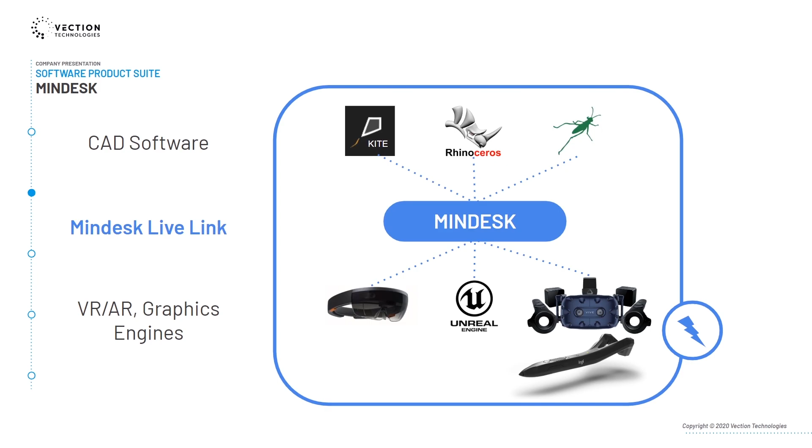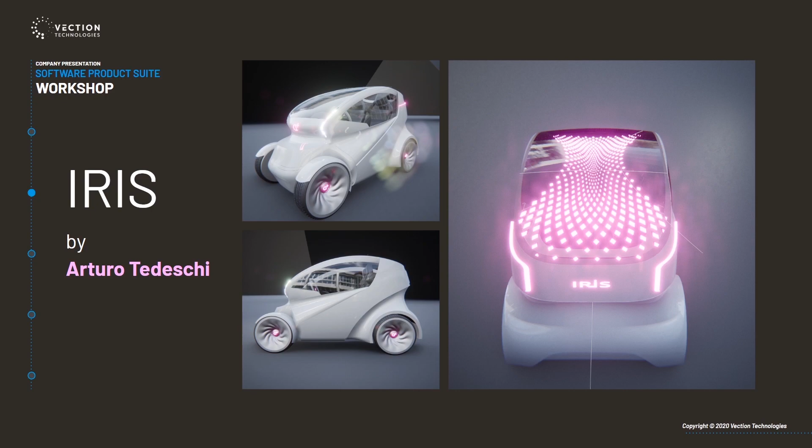So today we're going to show the process of creation of a 3D car using Rhino and Mindesk technologies. As I mentioned earlier, Mindesk is a real-time platform that connects CAD software like Rhinoceros, but also Grasshopper and Kite, to new technologies like AR, virtual reality, and graphic engines like Unreal Engine. Without further ado, I will leave the word to Arturo Tedeschi, who will present an original electric car concept called Iris.

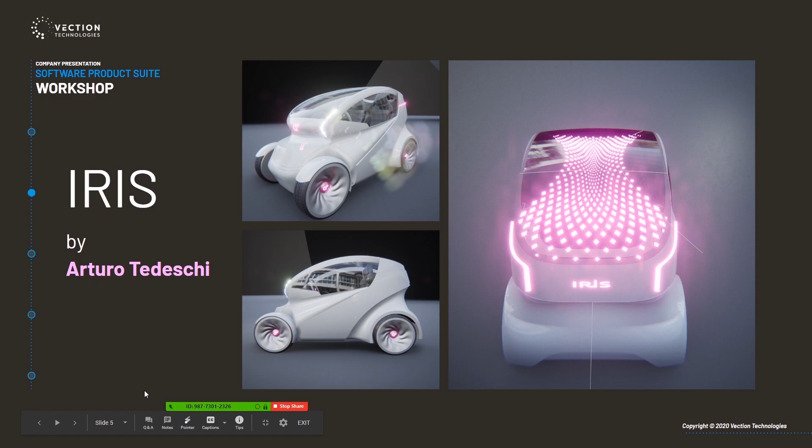My name is Arturo Tedeschi, as Gabriele mentioned before. I'm a computational design expert, and I'm the founder of AT, an office which works for all industries facing challenges connected to geometric complexity. Actually, we are not strictly car designers, and we are also involved in tool development.

So for us, with this concept, we explored the idea of a design journey - from a first sketch done by hand, through virtual reality, through real-time rendering. And there is an important thing behind that: we did everything in 5 working days. That's super important for me to tell, because since we are not car designers, by the use of advanced technologies, we had the opportunity to do this kind of design journey.

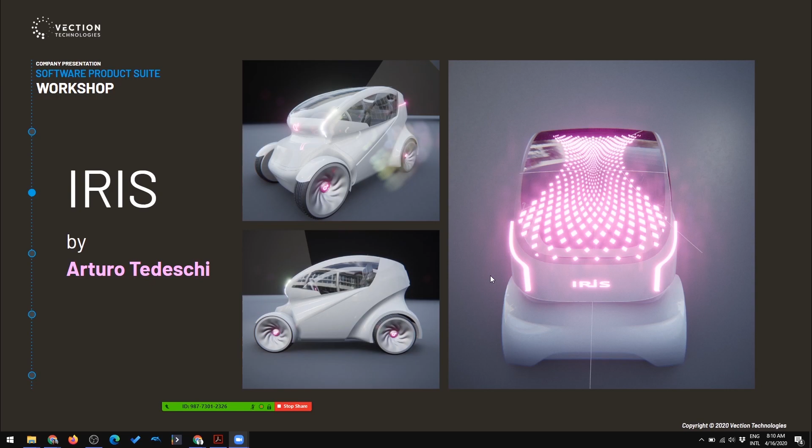Gabriele, you can also start the video if you can. Okay. So, well, the idea was to create a two-seater electric car with a feminine look, actually. So we also tried to create something that I defined as a possible future car.

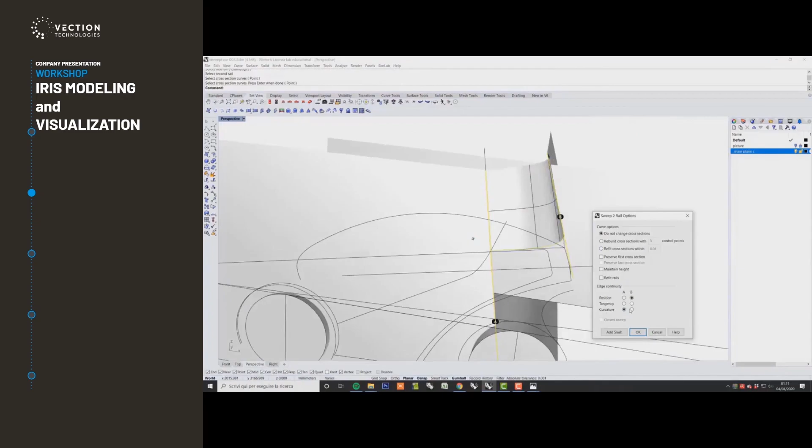So an advanced concept, but with the possibility in a way to design and to manufacture, to fabricate the car like today, tomorrow, in a way. So everything about the idea of something possible and advanced at the same time. As you can see now, there is an accelerated video about the first stage.

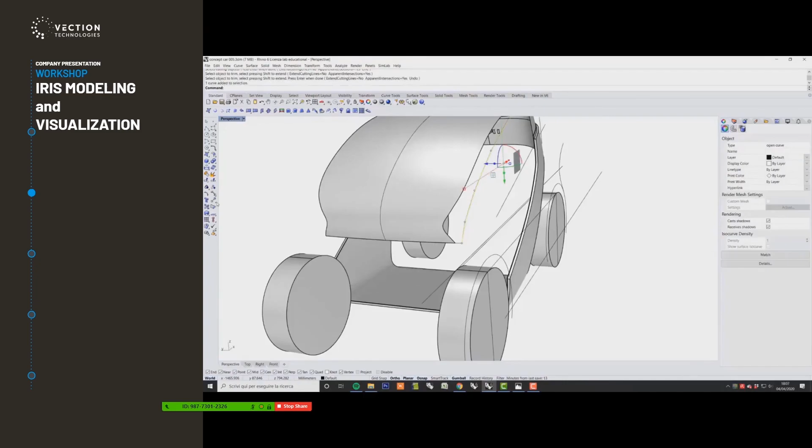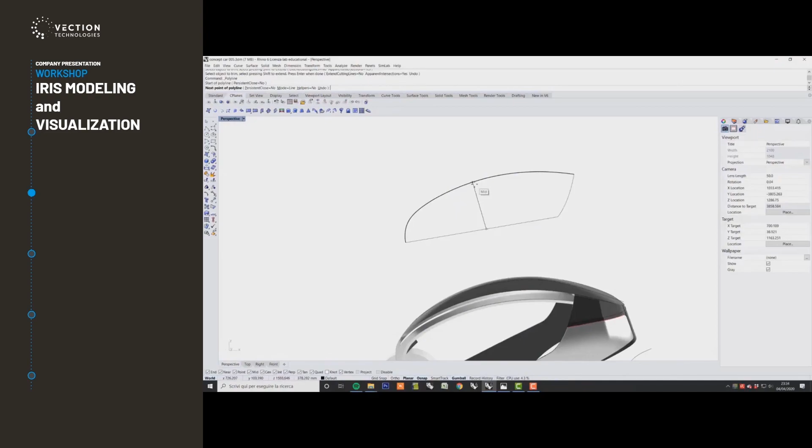That was about the three-dimensional modeling of the car. We followed, basically, we used Rhino in a traditional way, and according to a bottom-up process. So we didn't create the general shape using, for example, a subdivision tool, but basically surface by surface, we developed the whole process.

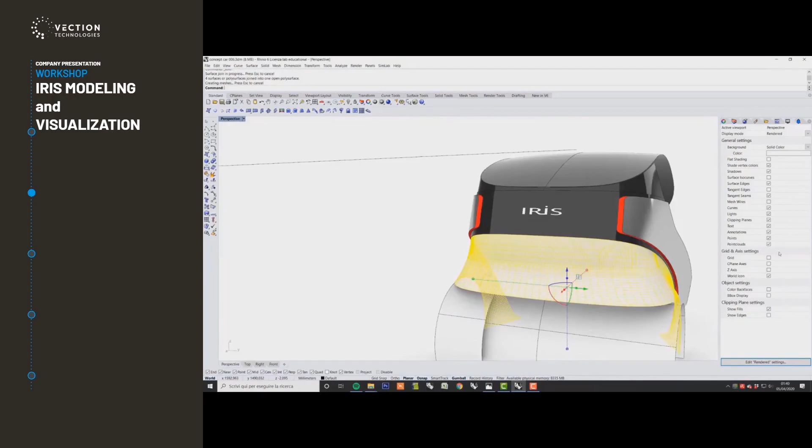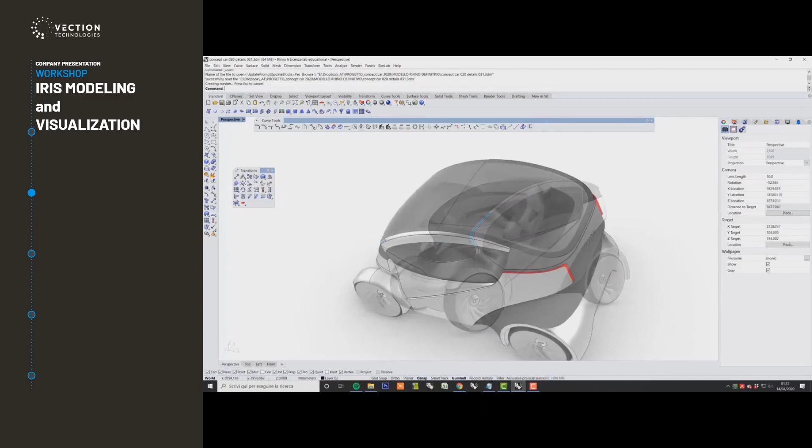Everything is NURBS based. We played with concepts like curve fairing, like curvature continuity. Of course, we used the tools available in Rhino in order to control all the mathematical features, like, once again, curvature continuity and smoothness, but basically according to a traditional workflow, from curves to final surfaces. In terms of design, you can see a transition between hard and smooth edges, in order to have, once again, a kind of feminine look to the car itself.

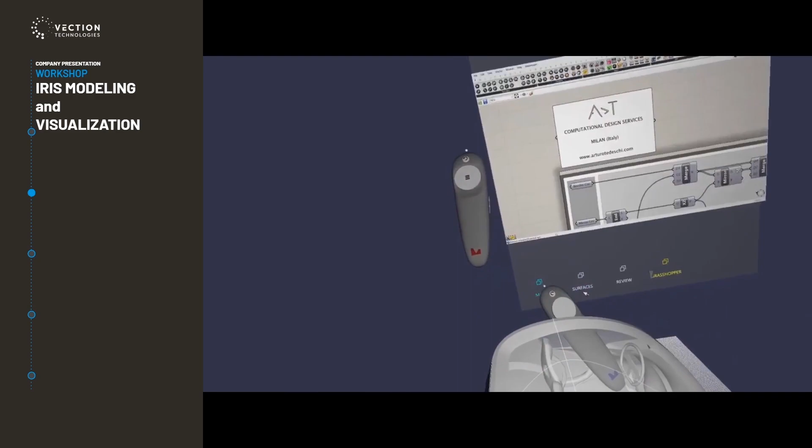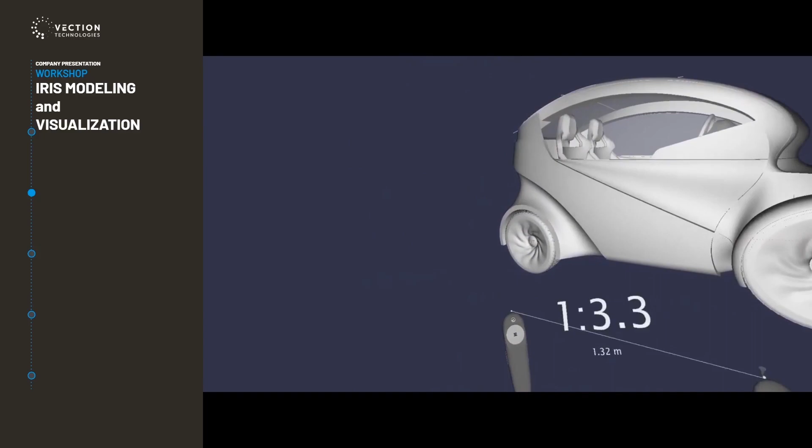Then we switched to the virtual reality realm, in a way, because we are Grasshopper experts - expert in creating algorithms in order to support the design creation. But in a way, sometimes it's very frustrating to jump from one platform to another. So that's why we used Mindesk. That was critical, and it was an amazing tool for combining everything together.

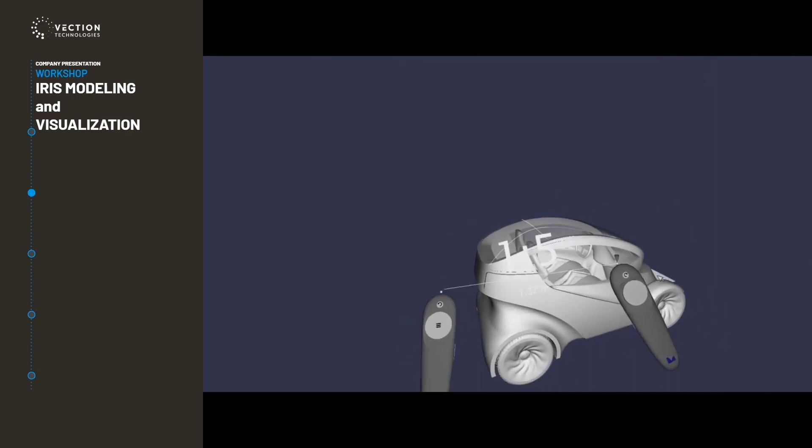So we had the opportunity to explore the object in a three-dimensional way. One of the incredible features that you can also see in the video right now - you can understand the scale of your object also with simple proportion that you can read while you are playing with joysticks in virtual reality.

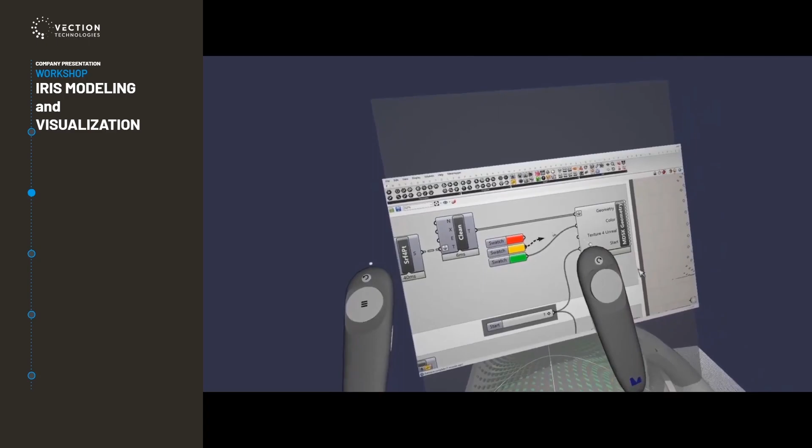You can combine things in a very specific way, and you cannot find this kind of feature elsewhere: the possibility to control the geometry, but also the algorithm, as you can see right now. It's unbelievable, amazing for us who use and play with Grasshopper scripts every day.

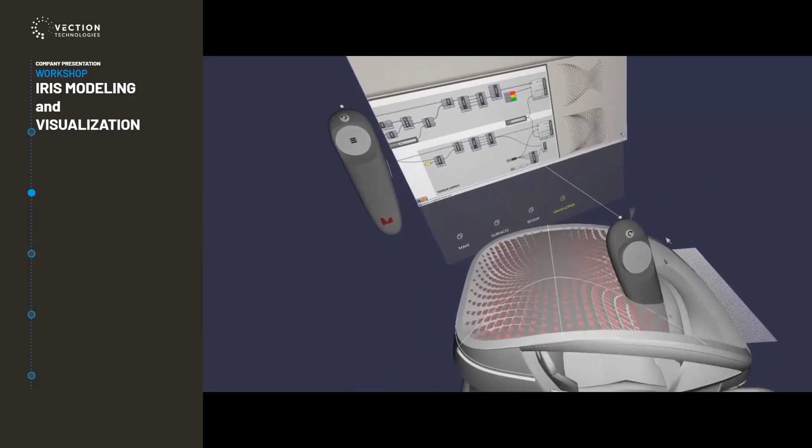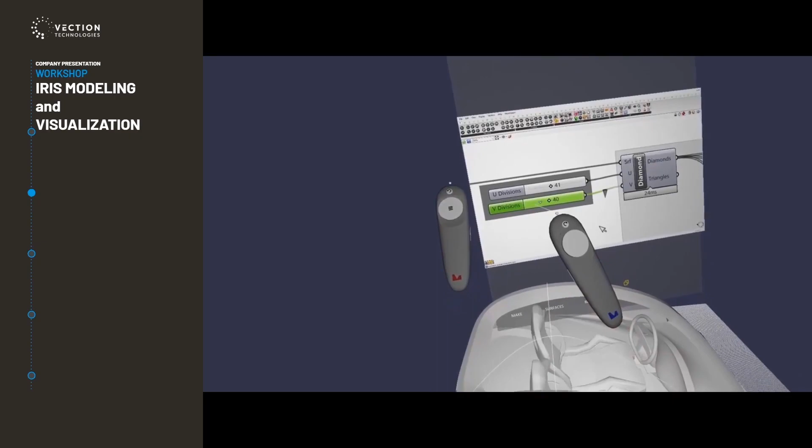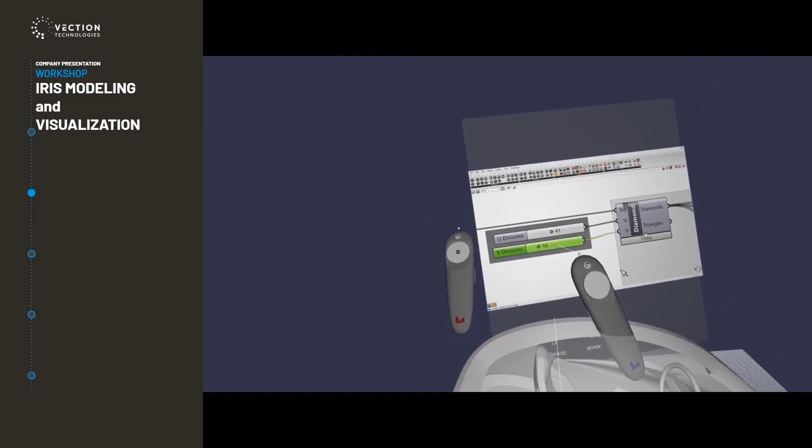In the same virtual reality environment, we have this kind of possibility to have a kind of canvas, where it's possible to control, to set parameters, and have a real-time three-dimensional output in Rhino, in the same VR environment, as you can see here.

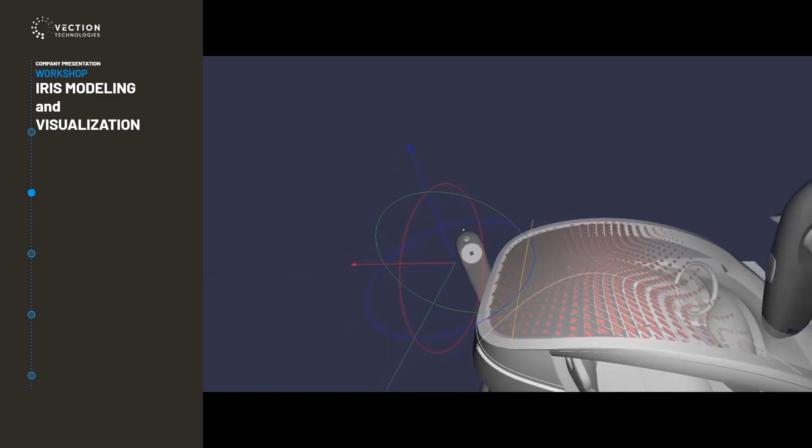That's phenomenal, because you can really forget about the tools, forget about all the complexity that we deal with every day when dealing with geometric tools. You are in your space, really focused on the output.

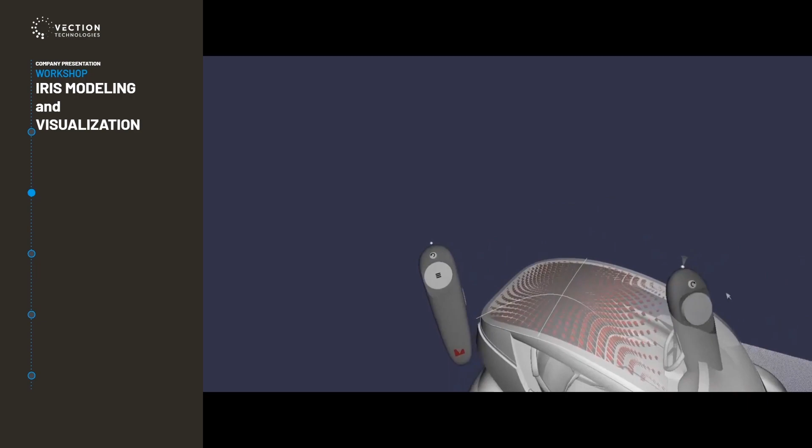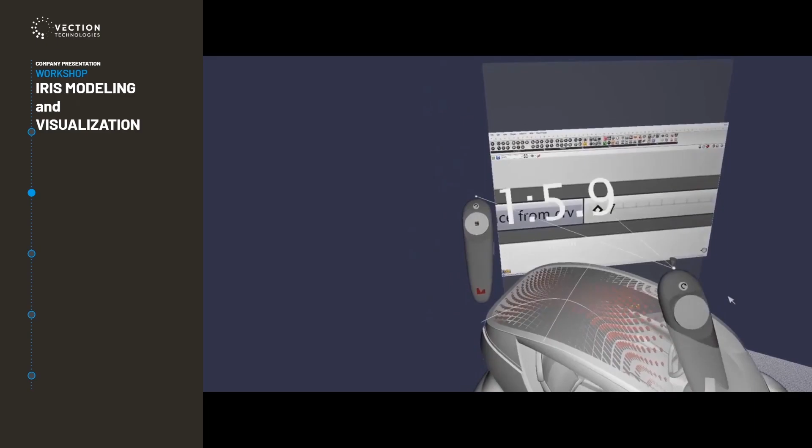As you can see, you have a kind of double interaction, since our algorithm was in connection with Rhino geometries. We had the opportunity both to control the algorithm itself in order to change parameters, and also to interact with Rhino geometries. In the same environment, you have the possibility to play simultaneously with the Grasshopper canvas and with Rhino geometries.

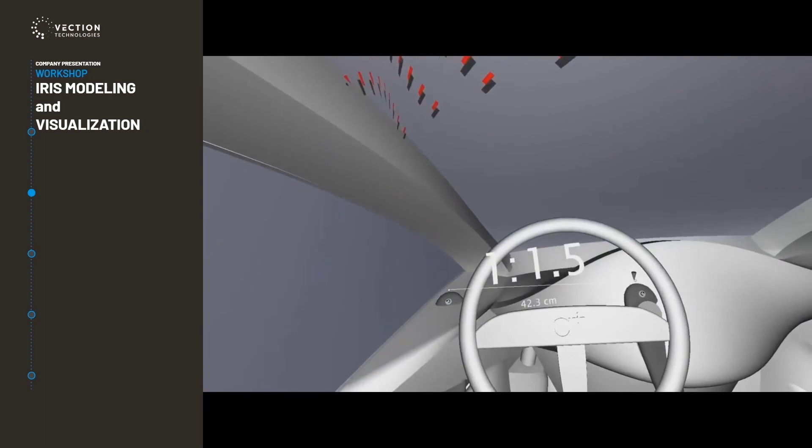For us, as concept explorers, as designers, it was the idea of being focused on the geometry, on the final output, as you can see here. It's amazing, the control of space, and at the same time the control of geometries.

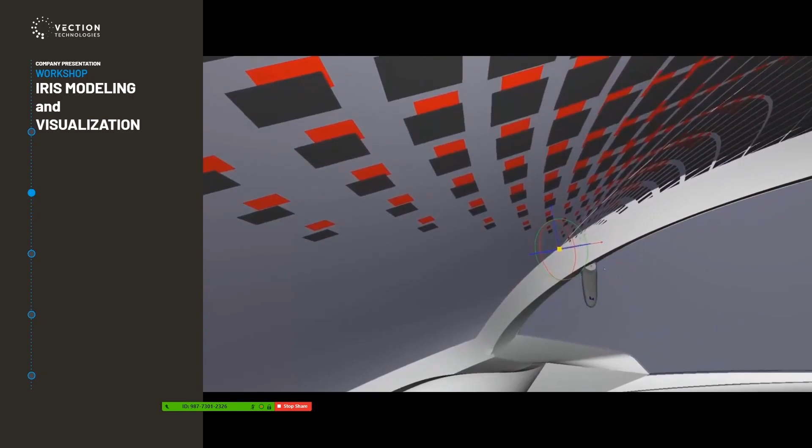As you can see here, the possibility to interact with geometries, with curves that in turn feed the algorithm that controls, for example in this case, this kind of shading system that we parametrically defined as an algorithm in Grasshopper.

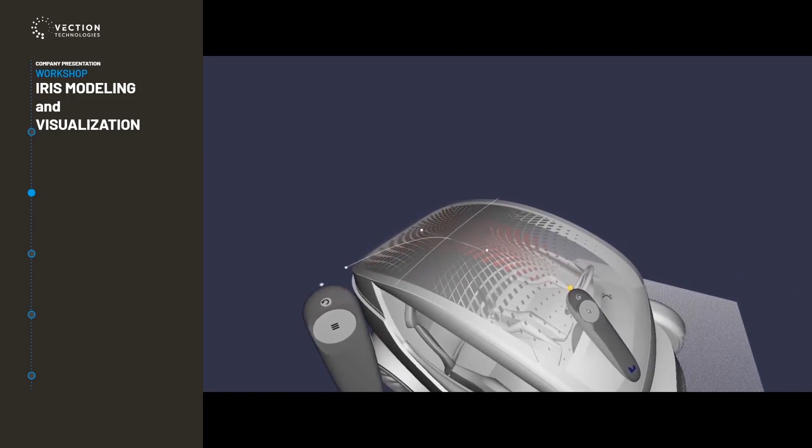You can play with the position and dimension of the shading system also when you are inside the car, in order to understand how it will look like when you are inside the car itself. So it's a kind of shifting in the way we design objects, and it was absolutely incredible for us.

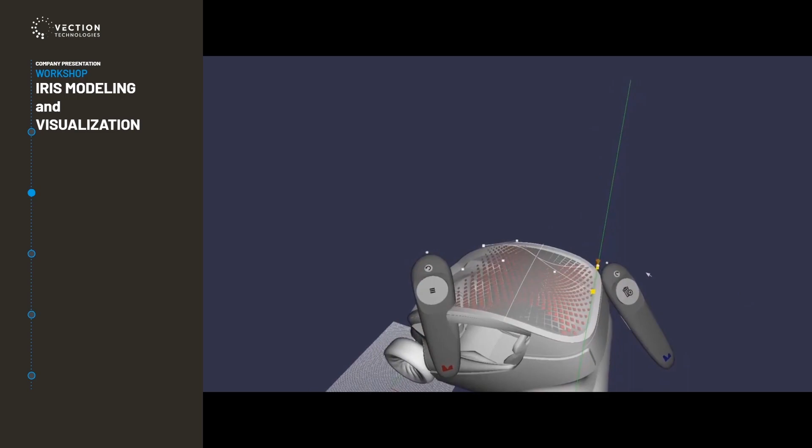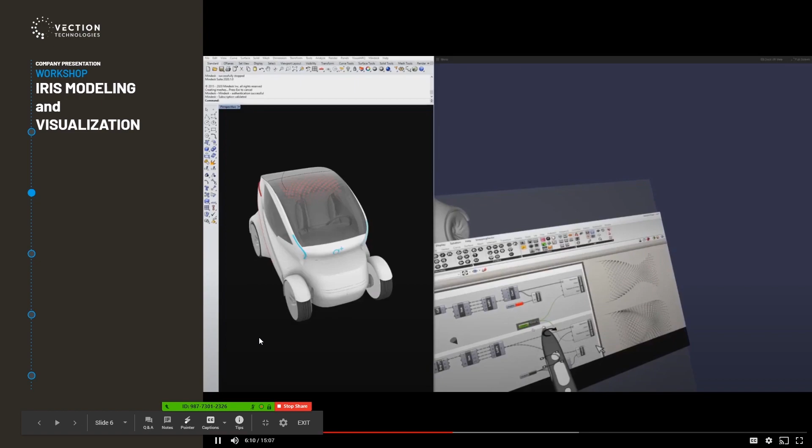I want to point out again that everything was created in 5 working days, and that absolutely would not have been possible relying on traditional tools. The scaling is also another absolutely important tool in order to control the shape.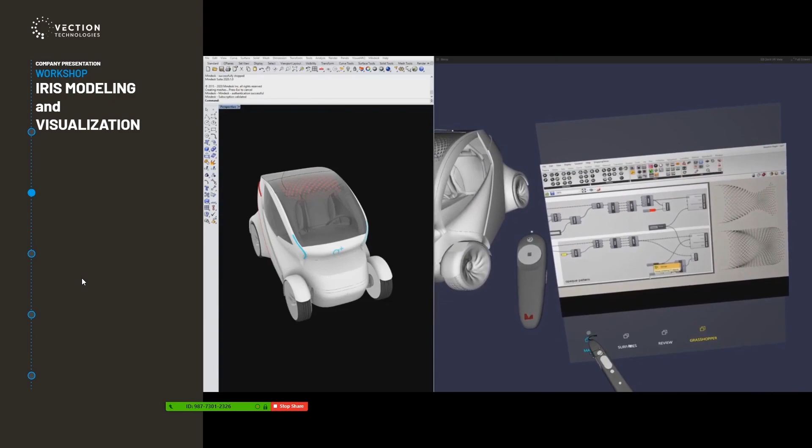Gabriele, you probably want to mention something about the interaction. This morning, one of the panelists mentioned patterns, and again, we are presenting a pattern. So we feel like we are following the wave.

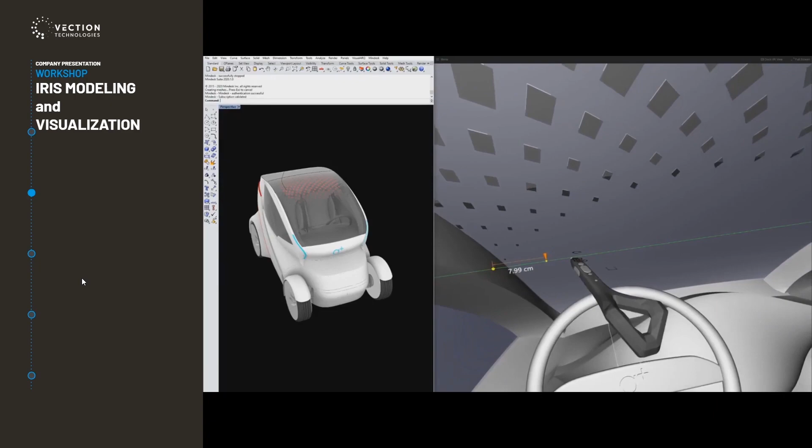Here, we can see also the use of the Logitech pen that Mindesk is fully integrated with, which can provide the most accurate and precise input possible. Indeed, we are using the pen here to take measures inside the car and also to draw sketches,

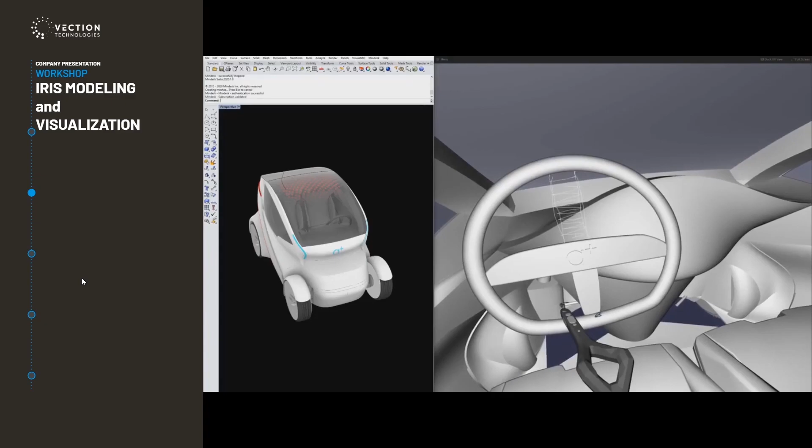like for example, this alternative bracing system for the wheel. It's very intuitive, it's just like having a pen that can draw and leave ink in the space, and you can make annotations.

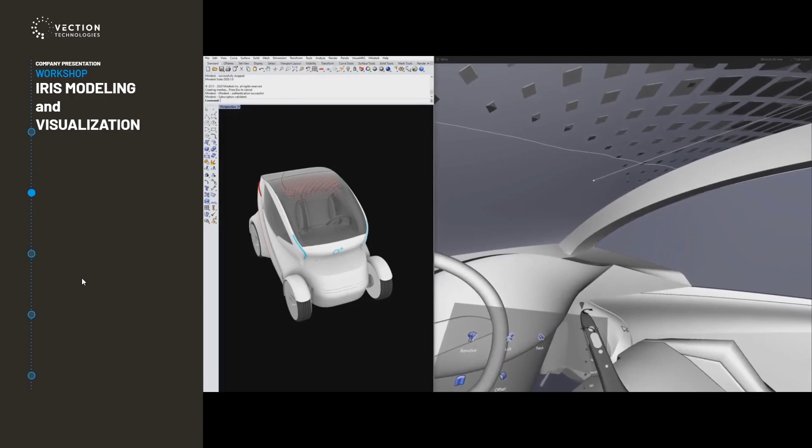For example, here we wanted to establish a limit that the pattern should never cross, so we can just draw a line. This line is stored in Rhino as a polyline. Then you, as an artist, as a designer, can edit the pattern, the curve, in order to not cross that line.

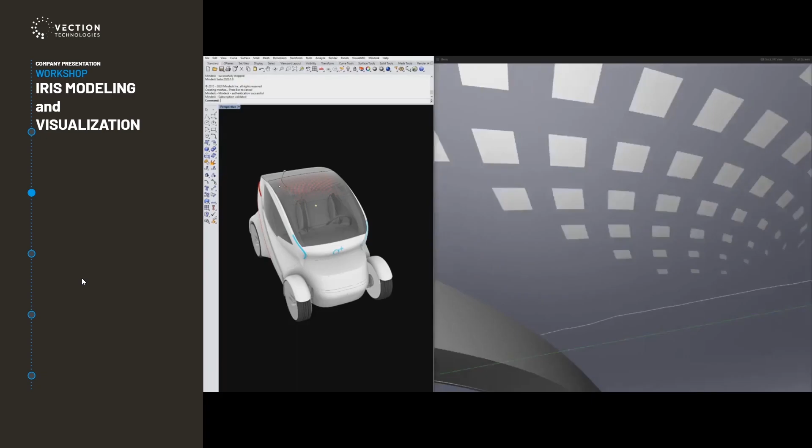This is just one example where interacting with the model in an immersive 3D space becomes fundamental, useful not only from an aesthetic standpoint, but also from a technical standpoint, because being immersed allows you to check the ergonomy of each space, of each component, and be 100% sure of what you're doing.

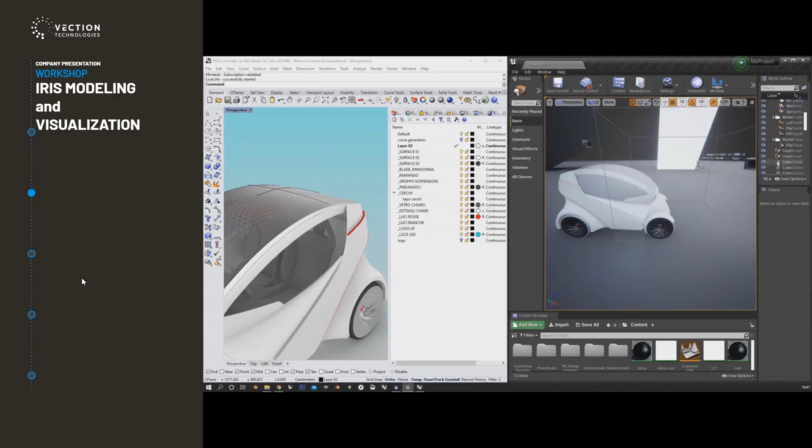Another super important feature that Mindesk allows users to do is this kind of amazing connection with Unreal Engine. You probably know Unreal is actually a video game engine allowing you to simulate physical behavior, also to define materials.

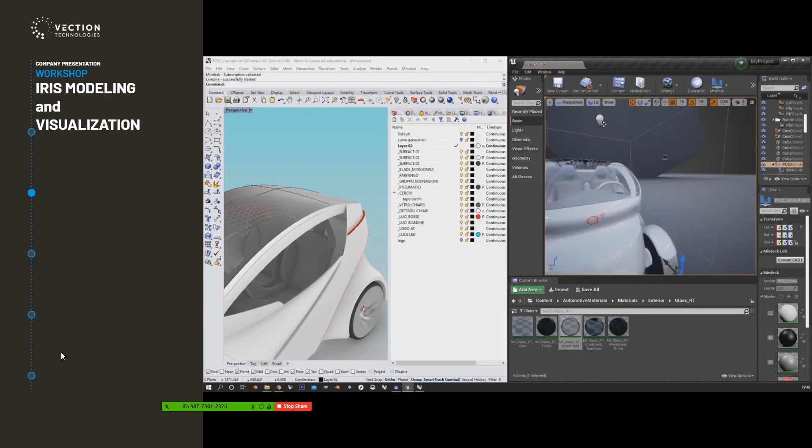You know how frustrating it usually is to control how your vehicle looks like when you are defining something. In general, the real-time renderization within three-dimensional software, also in Rhino, is not amazing.

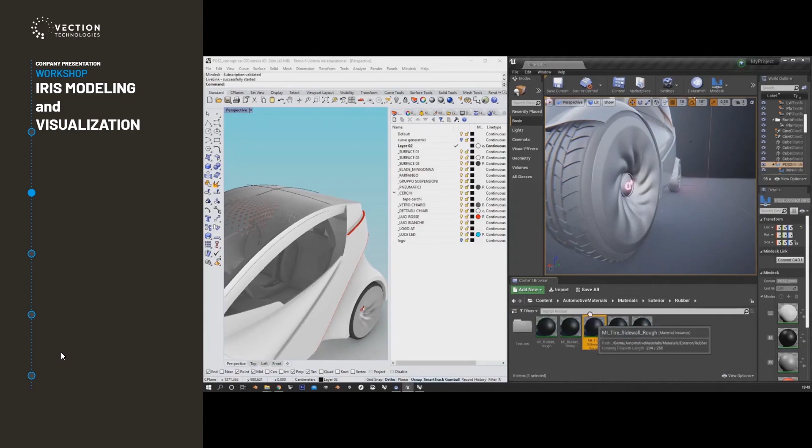It's very good, but it doesn't reach the level, the real life level. So Mindesk allowed us to have this kind of direct real-time connection between Rhinoceros and Unreal Engine.

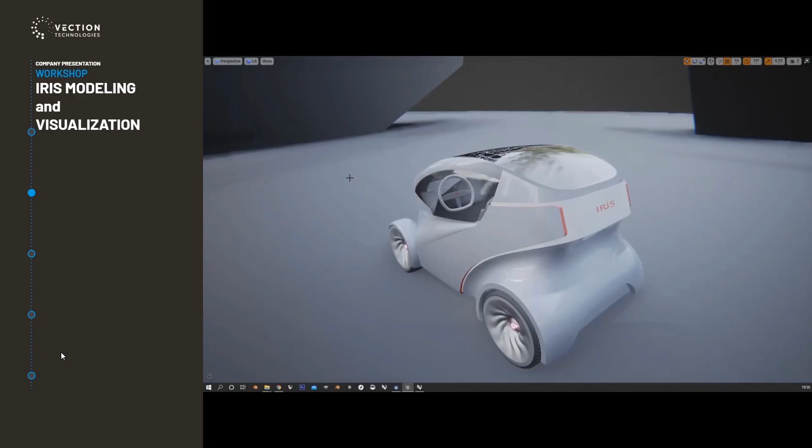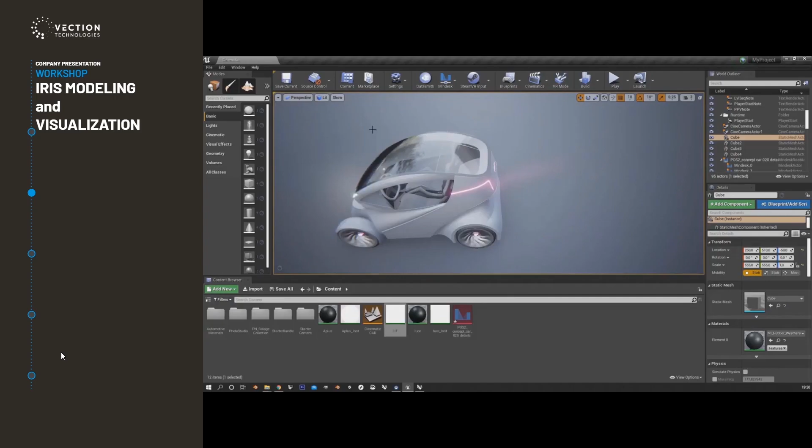So we have the possibility, as you can see here, to define materials like automotive materials, car painting, but also lights, as you can see right now. Materials are created in a procedural way inside Unreal, using a node-based interface.

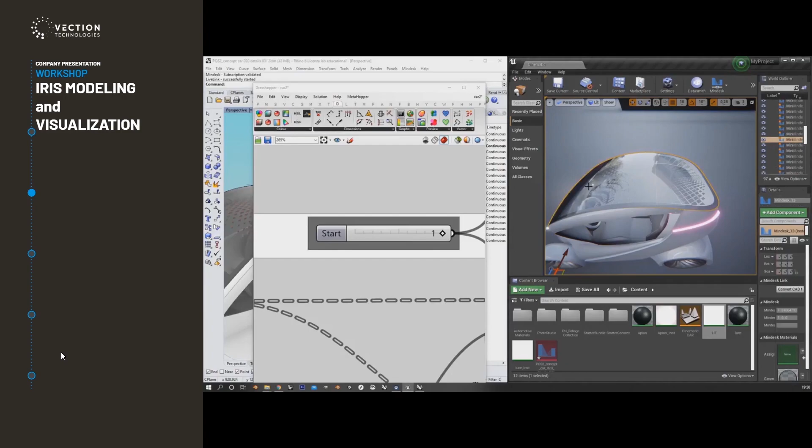And so it was amazing to directly work, as the screen is showing right now, playing with the geometry in Grasshopper, controlling it there. We had the opportunity to change the geometry using the algorithm, or in Rhino if you want, and applying directly the material like this. So this is something absolutely novel, at least for us.

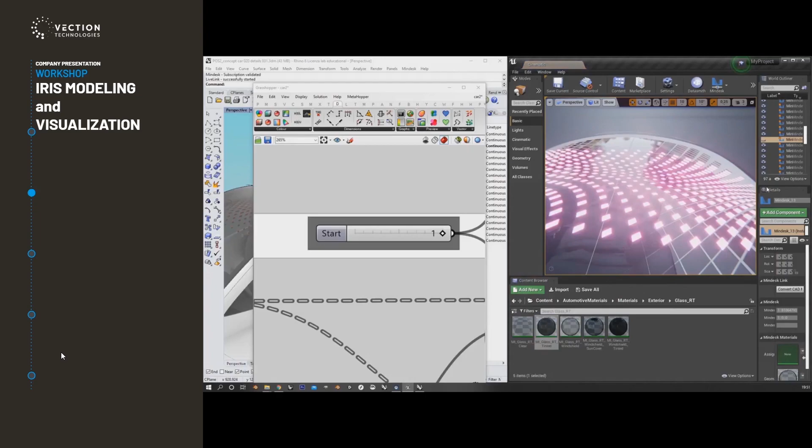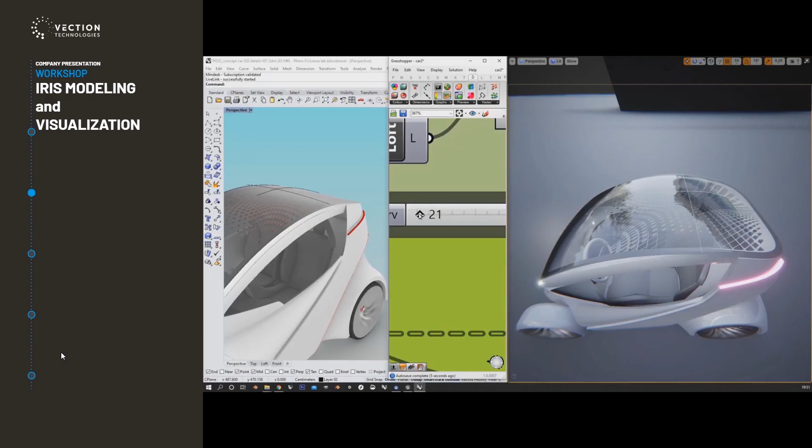So the possibility of having a kind of 360 control in shape generation, shape geometry control, and also controlling at the same time, managing the physical behavior in a way, but how the concept looks like with real life material. And everything combined, of course, with the virtual reality environment gives a kind of look which is totally immersive.

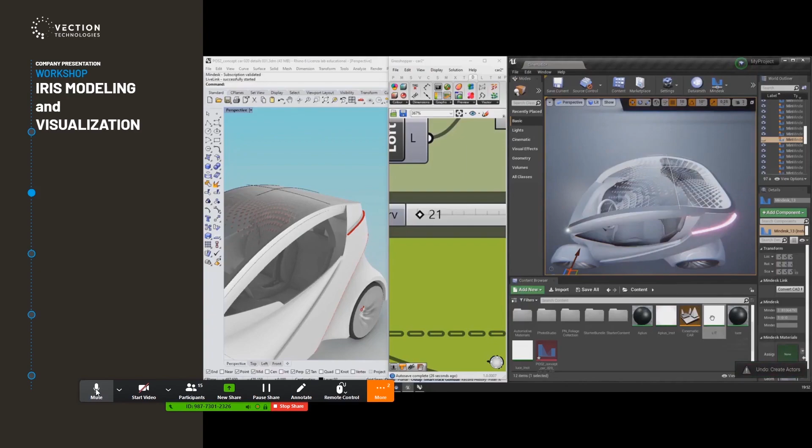We appreciated not only the shape exploration, but also the control and the possibility that is not available in other systems. Since I think that algorithmic modeling will become increasingly important, the idea of having a platform like Mindesk able to create this kind of connection is absolutely critical, and we get a lot of benefits from that.

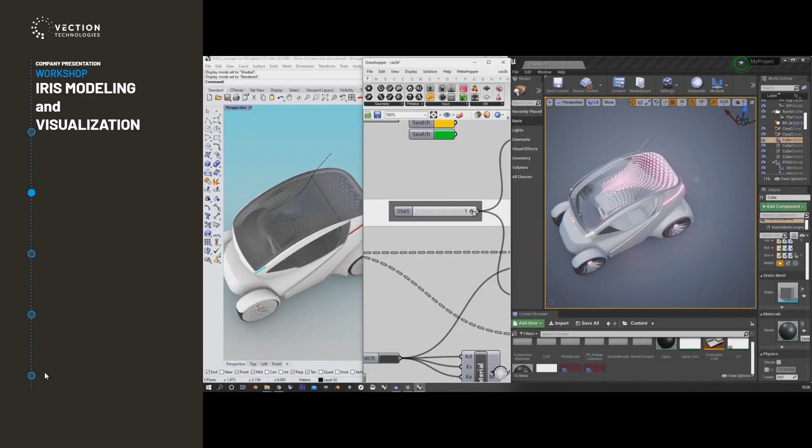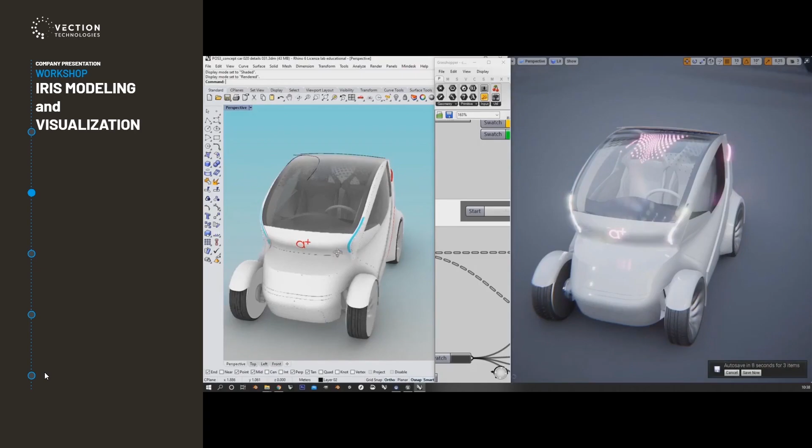Once again, I think it's not possible to reach this kind of design level if you don't have the right tools allowing you to explore all these things. As you can see now, here there is modification of curves in Rhino that creates modification in real time in the Unreal model with the material that interacts in real time.

Arturo, the pattern you have designed on the roofing of this car, yeah, it's really attractive and sinuous, if you concede me that. How was the experience of changing the shape and experiencing that outcome in real life? How did this affect your workflow?

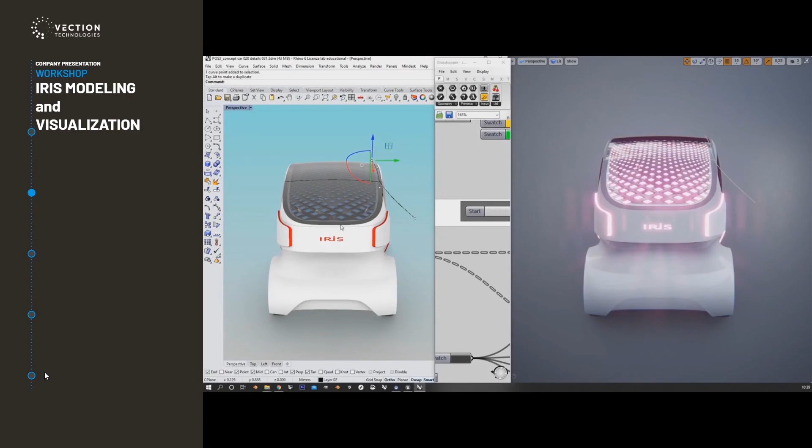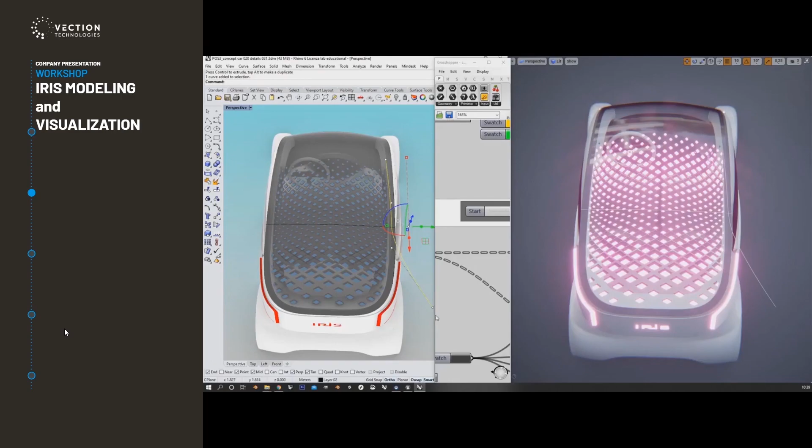That's a very important question because, in general, you create three-dimensional objects and pattern complexity sometimes, but in general you have a kind of flat output because the output from Grasshopper and Rhino is usually not only not attractive but is not realistic. So sometimes it is good on the paper, let's say on the digital paper, but you don't have a real 360 look. You cannot really understand how it will look like when you apply the material.

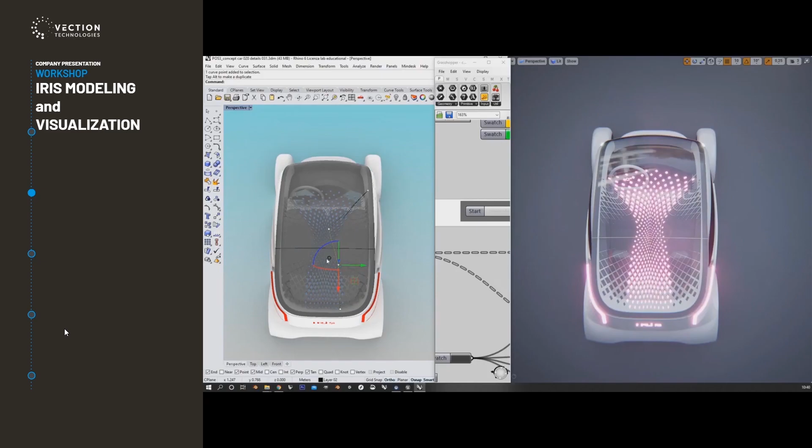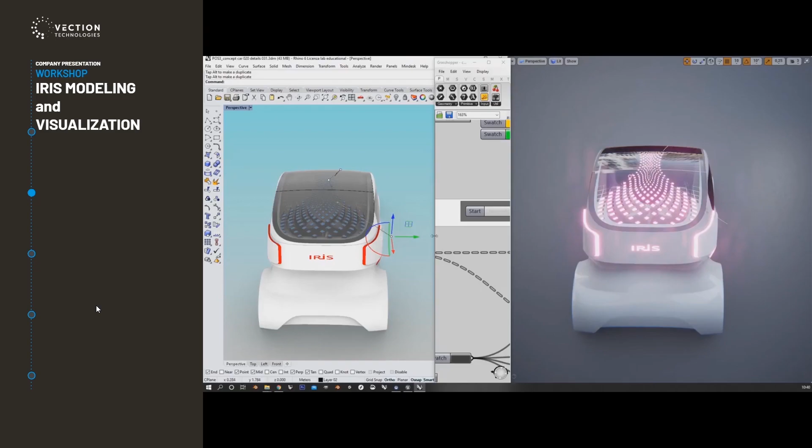Also because for the pattern itself, we have the opportunity to simulate and understand the pattern from the inside, and not only on a mathematical surface like usually we do. So it's very interesting that you can manipulate the geometric complexity when you are inside the car. That was super important in order to explore 3-4 alternatives that we selected for our concepts. And actually, they were not the ones that we selected before the pattern was applied in the car in real time on a real engine.

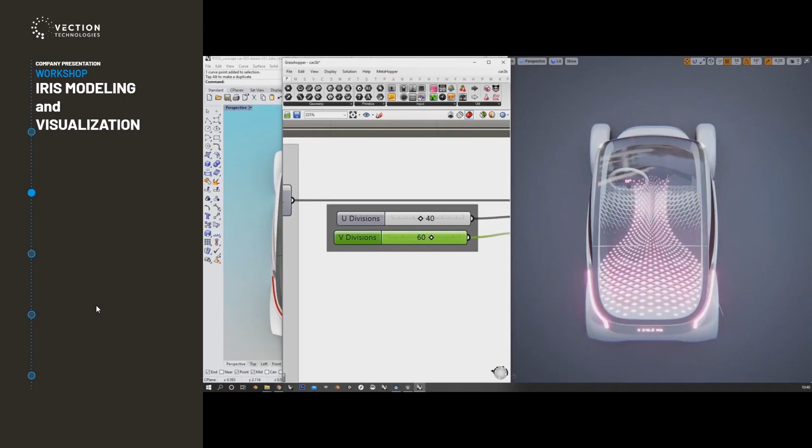Not to mention the fact that here the pattern is also LED luminescent, so there is also lighting involved, besides the materials. Absolutely - something that once again, the Grasshopper and Rhino environment basically flatten everything.

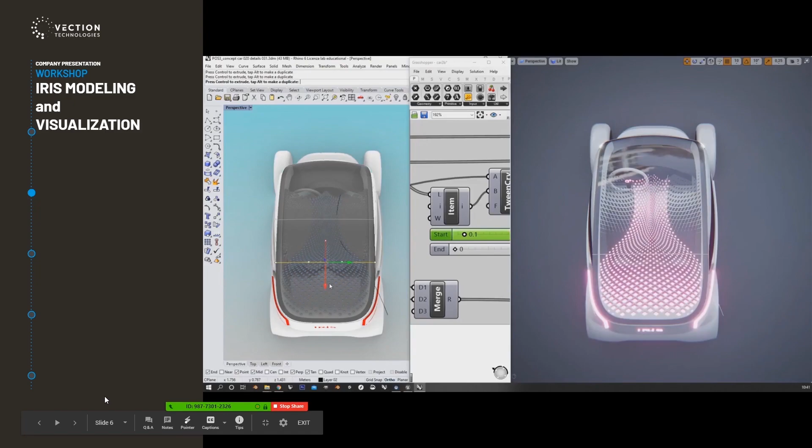You need to do a kind of effort in terms of imagination when you are just in Rhino. This kind of connection was super important for us to understand the real impact, and it's not possible if you cannot control at the same time geometry but also material, and in this case also the lightness effect, also the reflection. For example, we realized that some reflection was not good at the first time. And this is the outstanding final result.

I'm really glad that you worked with us on this concept. It was not possible without your fantastic tool. Well, thank you very much, Arturo. Thanks to you, it's a great pleasure.

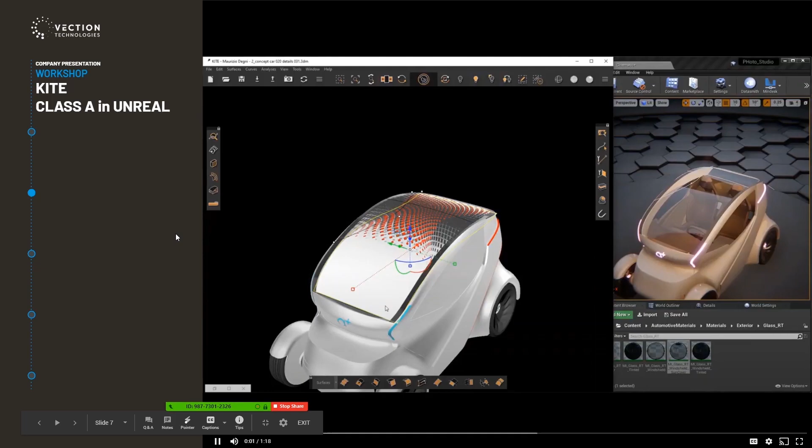I would like to show this other module where Mindesk is connecting Rhino to Unreal, and then we launch Kite.

Because Kite is based on Rhino, it just works immediately in real time, to the point where even the camera synchronization is affecting Unreal in real time.

As you select and edit this surface, this is immediately showing the final result in Unreal with material applied. In this case, it's a smoke glass.

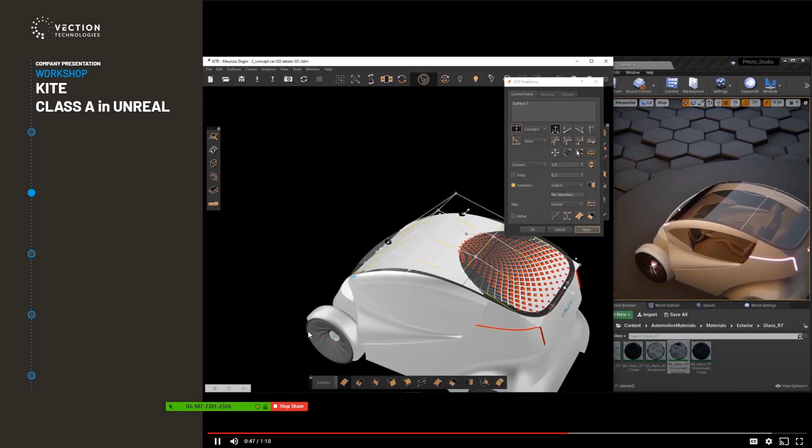On the roof of this car, moving forward, yeah, this is another editing process until we reach the perfect fit with the underlying model.

The other aspect is, of course, virtual reality. So we tested Kite in virtual reality, and again, it worked pretty well, meaning that you can explore the model.

And have a Class A surface in Kite. As you see, when I select the control points, they're activating in Kite in real time.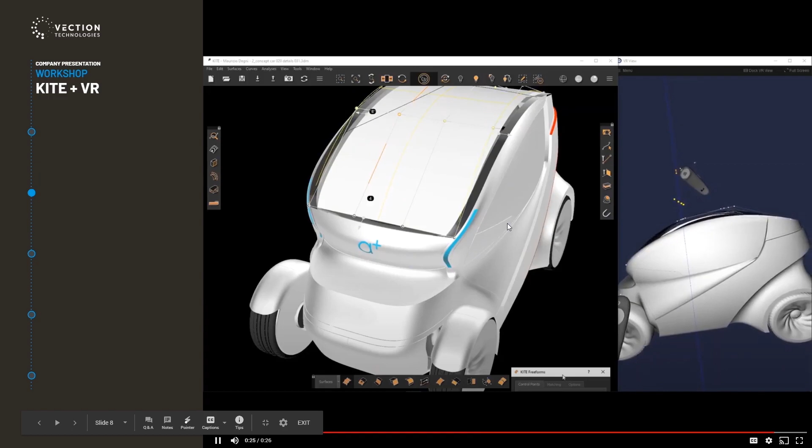So even selection is bidirectional, and editing the surface will immediately affect the Kite surface.

I didn't do this here, but it is bidirectional, so even working on Kite would affect the VR world.

So this enables the workflow that you were mentioning earlier, where someone worked from the CAD, and then this is happening in VR.

And then once we integrate this with Varjo, this could happen on a single machine where you have virtual monitors and the virtual model on site.

Hey, Gabriele, how fast did you do this? You got Kite last week, and it works now. Well, incredible.

A lot of credit should go to T-System, who developed a very intelligent software architecture that is based on Rhino.

So it was not necessarily a huge effort from our side to make this work, because even Mindesk has a very flexible software architecture.

So when we put all together, there were no bugs, no flaws. Everything was pretty stable, and even the connection to Unreal was pretty straightforward.

And this is the demonstration that when companies have a far-looking approach, and they do the things properly.

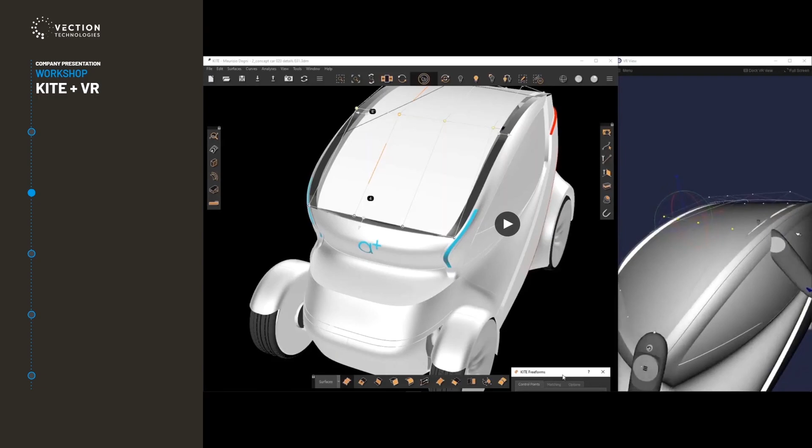Then we also reach a level of reliability that is not common, frankly speaking. And this, well, is done.

This is the last point I want to touch today. So today we explored a journey from the early sketch to the render, but we can push this journey even farther.

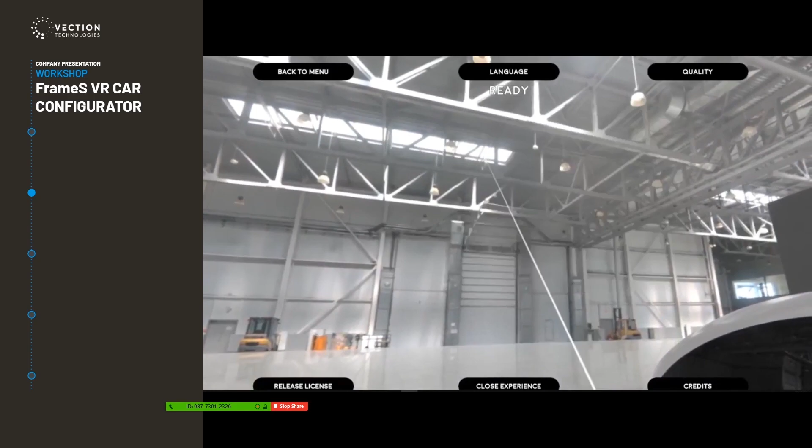To the car dealer and see what we can do. So we exported the car into the FrameS platform, and in FrameS we have a super intuitive interface that anybody can use.

To explore the 3D model of the car, but also configure it. And this is ideal for dealing with the final customer, for example, at the car dealer point.

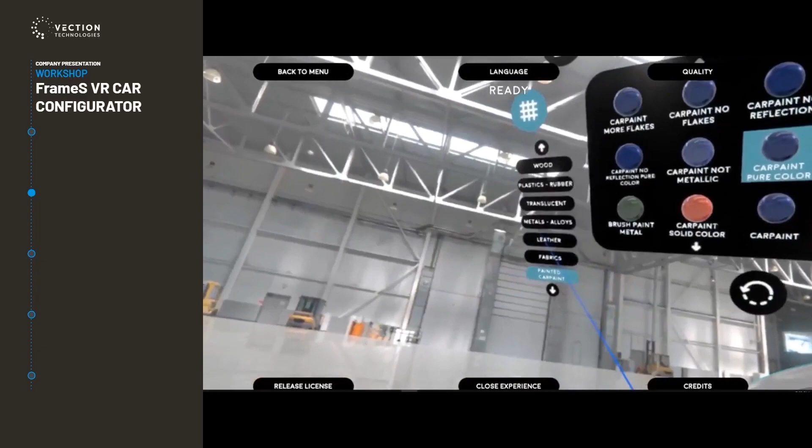And this is what we're looking forward to, so to cover the whole life cycle of a car, from the first sketch to the sale process.

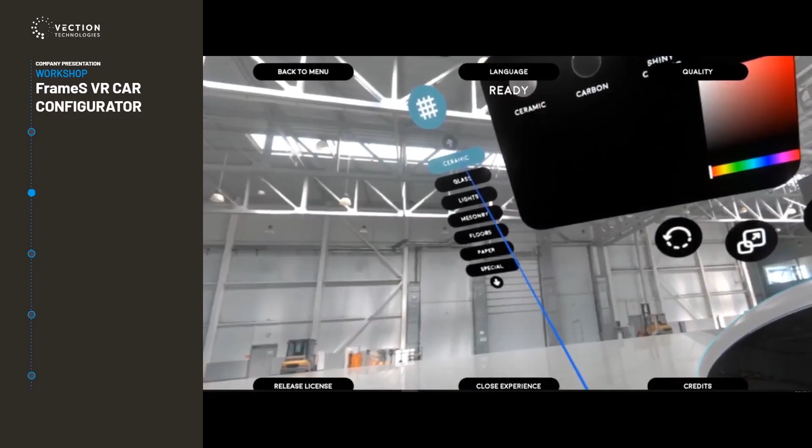I mentioned earlier something that we are exploring: the possibility to empower the car configurator.

Not only with the possibility to personalize and customize the material, but pushing forward with the customization of geometry, like replacing single parts inside the car model, or even customizing the geometry and the shape.

Imagine if you could change the shape of the rims in a parametric way, and then have a custom rim delivered from the car producer.

This will be possibly something that is not possible today, but we could reach this level by integrating the Mindesk technology into car configurators like FrameS.

This is an open discussion. I would like to receive your feedback on that as well.

Gabriele, where are you taking the materials from? Could we, for instance, add our internal materials to this library and use it in the dealership?

Yes, it's very likely that we can arrange this, because materials today have a very standard definition. So we can definitely work on synchronizing these libraries into FrameS.

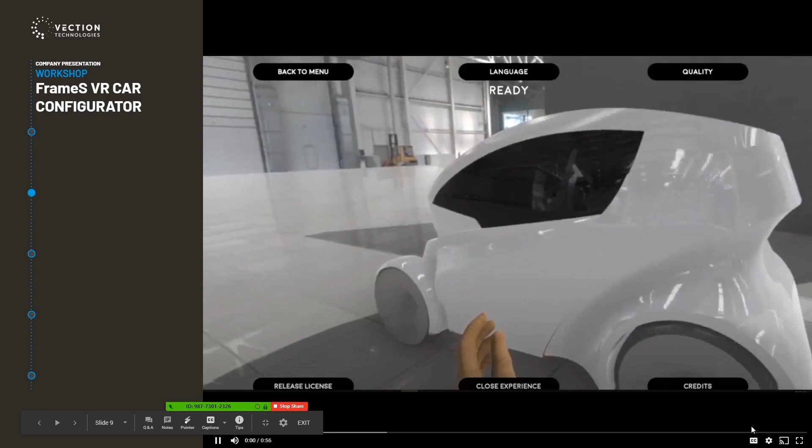And which materials are you using right now here in your demo? Are these from Unreal? No, these are our custom materials.

FrameS, oh, is a software based on Unity. Okay, just to give you further information.